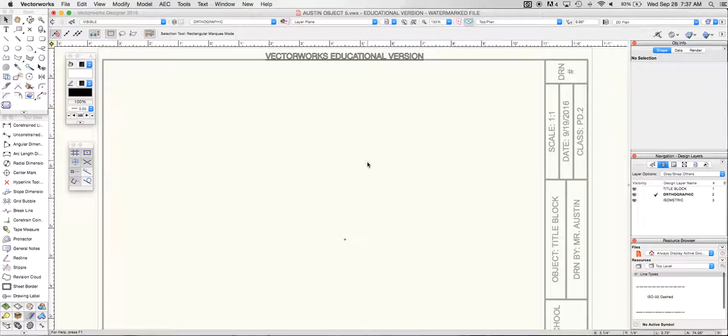So today what we're going to do is we're going to draw object number 5. To draw it, we're going to start off and make sure we've renamed our document so we're not drawing over top of our title block. We've got our visible class selected and we're in the orthographic layer.

We're going to start with a rectangle, and the rectangle is going to be 5 by -3 and a half. That's just going to bring it down into our document. Now, honestly, I've preemptively scaled this because I know that the object's a little bit big.

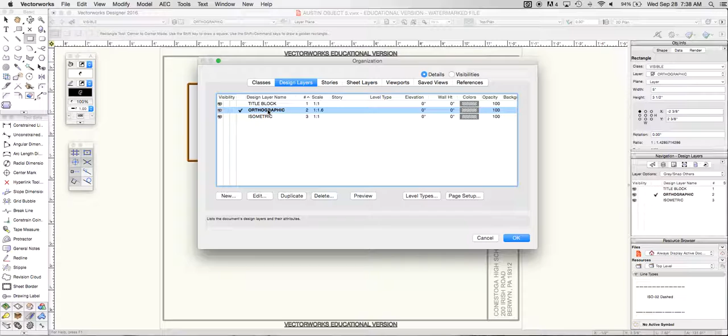Just as a reminder how to scale, you come up to your scaling option. To get that, we're going to double click on the layer stack, then double click on the orthographic layer, hit the button that says scale, and I'm going with a 1.6 to kind of keep this on my document. I'm going to click OK. And now I can continue.

What's nice about this object is it also requires us to set an origin point. So I'm going to go ahead and set my origin point. Remember, for setting the origin point, we need to be in the top plane. And I'm going to go to this upper left-hand corner.

What I'm going to do is draw 2 lines, one visible, one hidden. The first thing I'm going to do is, in the hidden line, it needs to be a half an inch away from my origin point in the negative. So I'm going to do -1/2 over here in my object info.

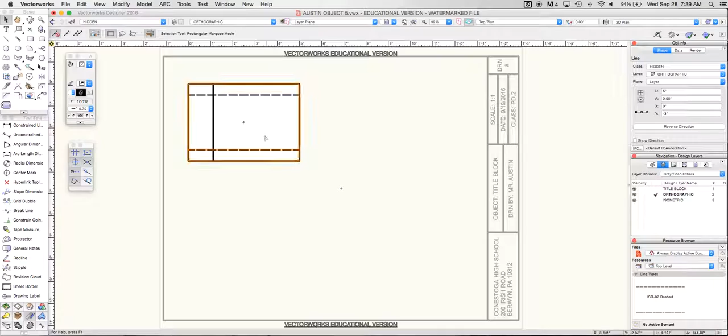I'm then going to duplicate that line, and I can just do some simple math here. I've got 3.5. If I want it to be a half inch away from the other one, I would just make this one -3, and now I have both of those lines. Notice how I only drew one, and then I duplicated it and moved it that way.

This one here is going to be 1 inch away, so 1, and then I'm going to duplicate that line. Once I duplicate that line, I want to be 1 inch from the other side, so this one's going to be at the 4 mark.

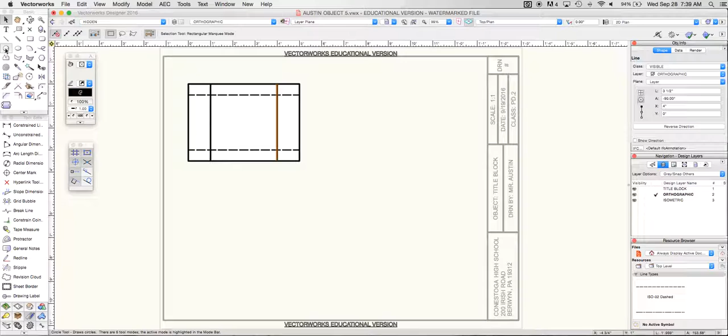From here, I can now draw my circle, also in the visible class. My circle is going to be 1/4 of an inch radius, or a half inch diameter. And because that first shape is a rectangle, I've got that center point, I can then verify that to the center of my object. I'm going to take this whole object, and I'm just going to nudge it up here a little bit in my printable area.

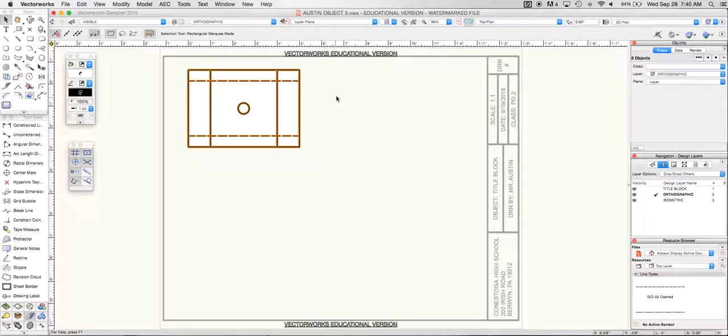And it's now time for me to go and do my guide class. So I'm just going to bring my guide class down, holding down the Shift key. To help us with some spacing today, I've got another suggestion for us. I'll bring down this circle.

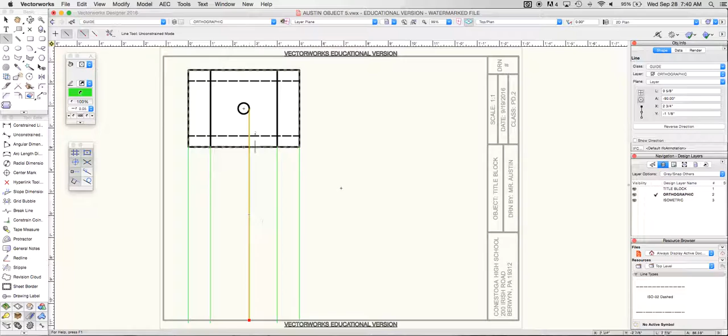My suggestion is I'm going to draw one more guideline, and I'm going to make that guideline 1.5 inches away. With that 1.5 inches away, I will be able to now take my object and start with the 2D polygon tool back in the visible class.

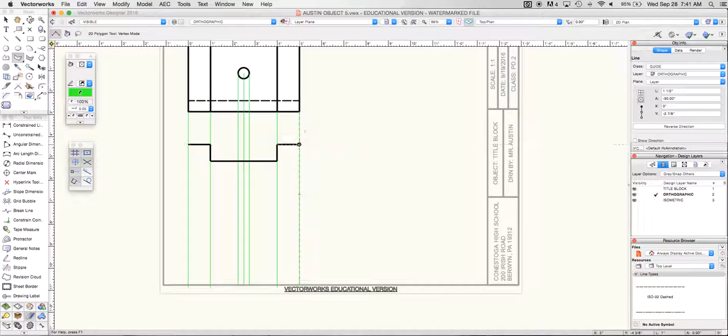This is going to be my starting point. So I'm going to be able to come over here, down 3/4 of an inch, over, up, to be level, across. And then this overall length here is going to be 2.25.

I'm just going to bring that over to meet, and then there's my object.

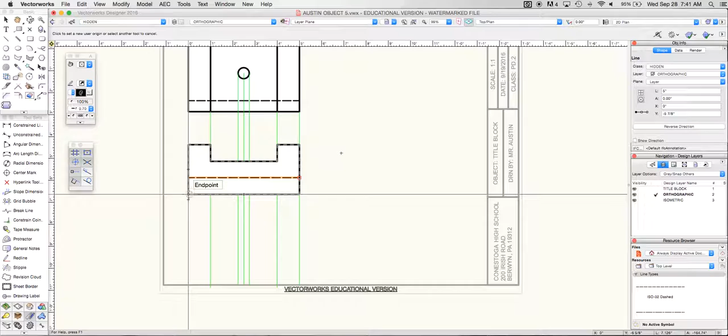So here's another opportunity for us to get our origin point. I'm going to take my hidden class here and draw a line across. My hidden line needs to be 3/4 of an inch from the bottom. So I'm going to take my origin point, select that into my new corner, and over here make sure that my Y says 3/4 of an inch.

Now I got lucky there. That barely ever happens, that I'm able to draw that exactly where it needs to be, but it's now in that 3/4 of an inch. From there I can now take my normal hidden lines for my hole and my center line for my hole.

And remember, for the center line, you want to start just above and you want to go just below. I know a lot of us have been having issues with the center line not centering itself with the pattern of the line. We're going to look into some solutions for that as we continue, but for right now just let that lie as it's going to be.

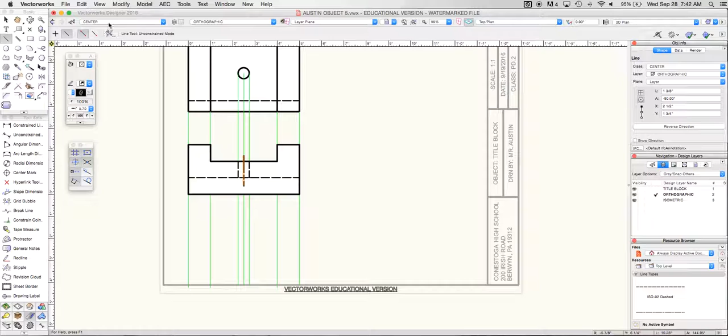We're going to go back to the guide class, and it's now time in the guide class to give me my 45-degree angle. And from my 45, we're going to bring this down to my overall shape here.

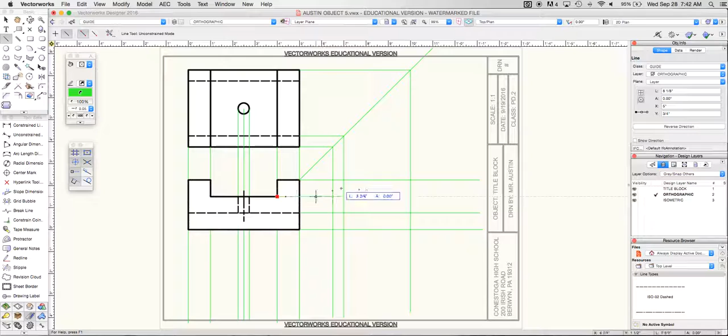We're kind of doing this all nimbly-bimbly and out of order. I think that's everything I want to bring down and over.

And now what I need to do is get my 2D polygon tool. I'm going to switch back over to my visible class, and in my visible class I'm just going to start down here and make this object. And there's my object. It's now time to get my line tool.

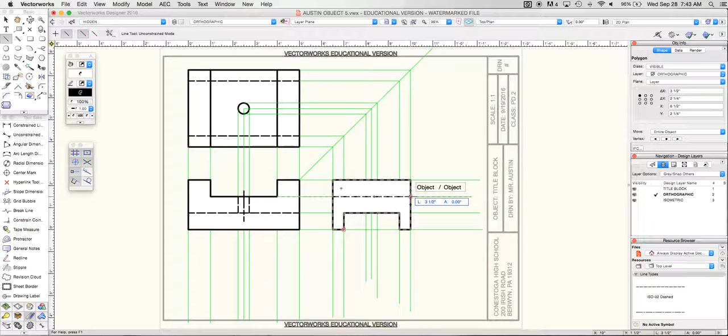Let's go to the hidden line section. I'm going to have a hidden line coming across here, and I think this is also a great time for me to take these 3 lines and duplicate them and bring that over into that center section as well.

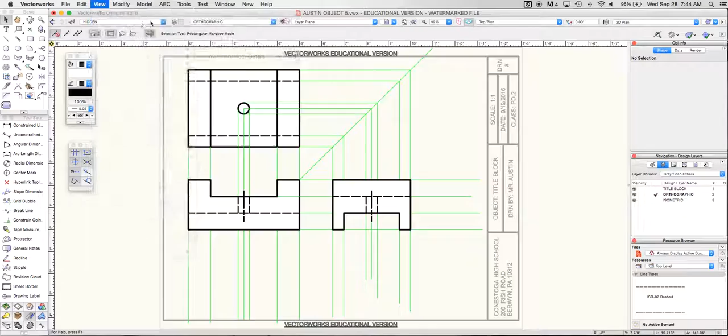And there we go. Now it's time to finish my drawing by coming up to View, Class Options, Active Only. We're going to go over here to the Guide class, select it all, and delete it. We're then going to go back up.

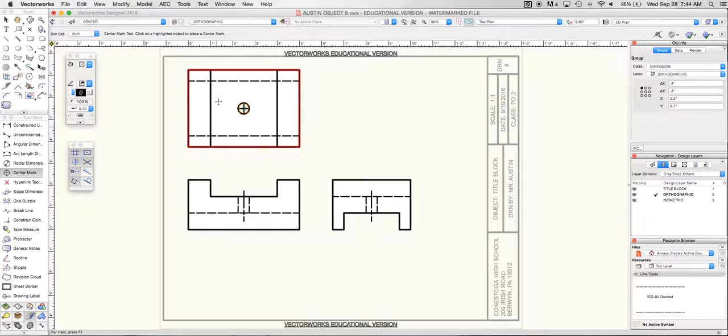Class Options shows Snap Modify Others, and it's time to put my center mark in. So I'm going to grab my center mark tool. Now this is where a little caveat starts to occur. I'm going to be in my center class here. You're going to notice that if I select that, you see how small my center line is, or my center mark? I'm going to go ahead and delete that for right now.

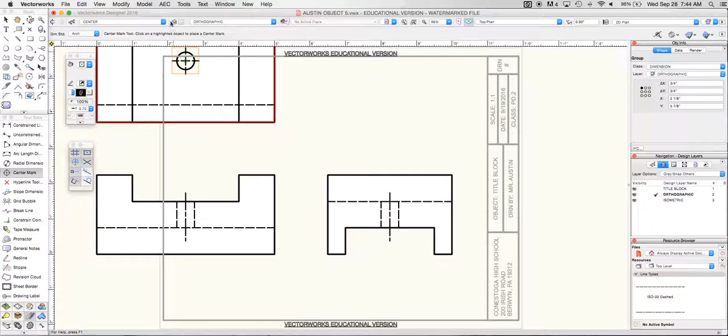If you scale after the fact—I'm just going to make this 1 for now. We know it's too big, right? We know it's too big. What's interesting about the program is if I put that center mark in now, it's nice and big on my object. Then I can come back in here and rescale this. And when I rescale it, for some reason, the center mark does not minimize itself.

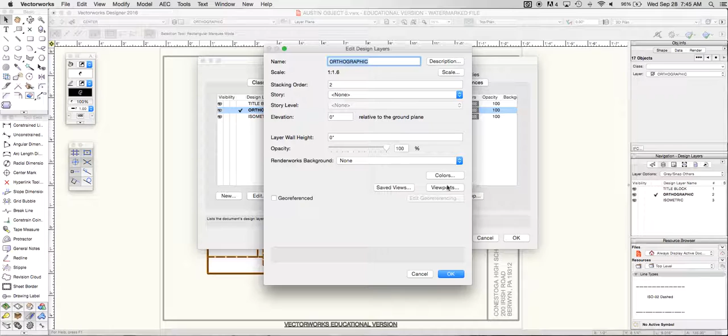And then what I want to do is just select all of that and put it down here in my printable area. I could probably even afford to go a little bit bigger on this object, selecting a different scale. Right, I'm just trying to fill that printable area.

And now that I only have 1.5 inches here in between the objects, I could probably even afford to go a little bit bigger, maybe a 1.3. But yeah, this is object number 5.